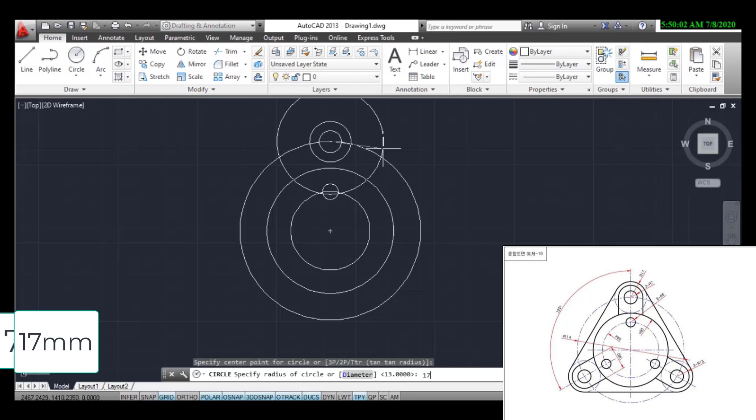Now let us apply the polar array command to all these circles. I'll select the polar array, then select all these circles, press enter. After that, I'll specify this center point here to be the center point of my array. Now let us change the items count from 6 to 3, type in 3, press enter. Then I'll close the array.

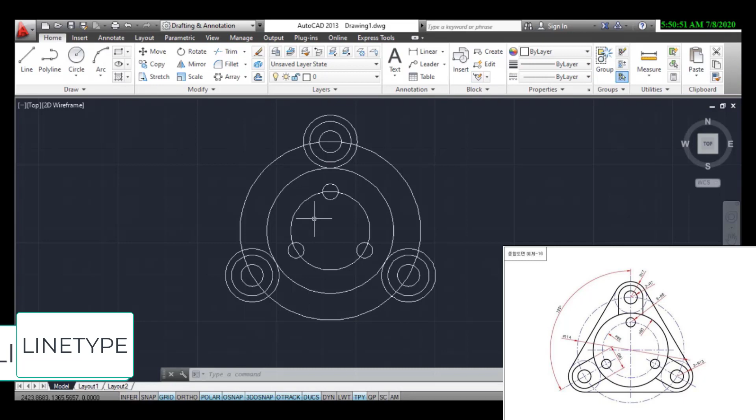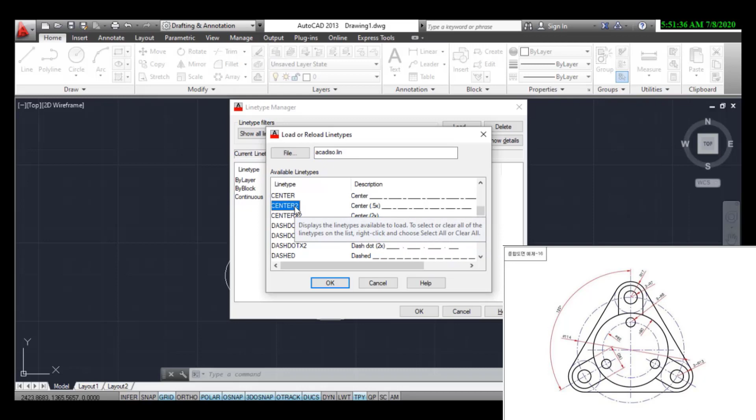Now type in the command window 'linetype' and press enter. A linetype manager dialog box appears. From that, select the load option. Another dialog box appears. From that dialog box, scroll down until you find the linetype written center 2, select it, then click OK. Click OK again.

Now select the innermost and the outermost circles - this one here, and this circle here, and this one here. Now go to the Properties panel and select the by-layer option, then select the center 2 linetype. After that, click on the down pointing arrow of the Properties panel, this one here.

As you can see, we have the transparency option. Let us change the transparency value to 69. Type in 69, press enter, then click on escape. As you can see, we were able to apply the center 2 line option on the outermost and the innermost circles, and then we increased the transparency value to 69 to make these two circles appear faded.

Now I'll draw a line from this point here on the 13mm radius up to this point, from this point here up to this point, then press enter.

Now I'll apply the mirror command. Select the mirror command, then select this line here, press enter. I'll specify the first point of the mirror line from this point to this point. Click enter again.

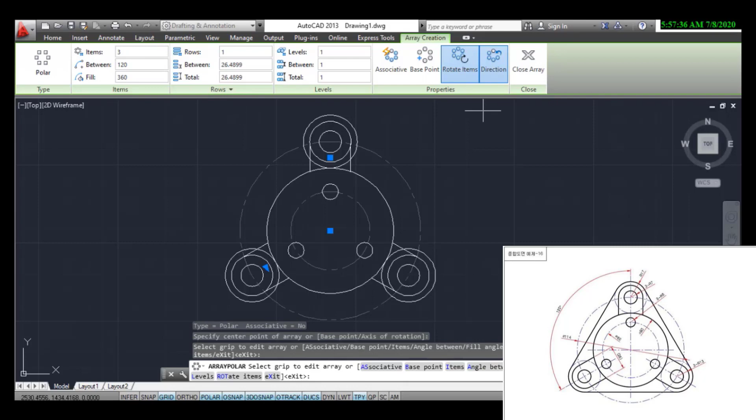Now let us add the outermost lines. Select the line command. As you can see, the center snap option gets in my way, so I'll turn it off.

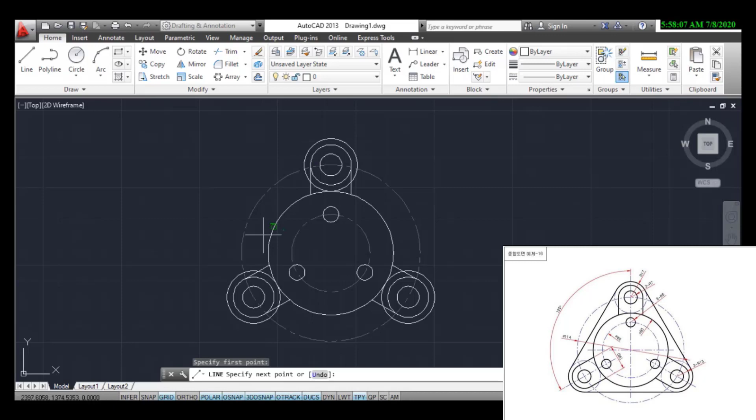Then I'll draw this line from here up to here, press enter. I'll also draw another line from this point to this point, press enter. And I'll draw the last line again from this point to this point, press enter.

Now let us trim all the parts that you don't need. I'll select the trim command and press enter, then start trimming. Also trim this one, and this one too.

Now let us apply the fade and center lines. I'll draw a line. Let us turn on the center snap option. I'll draw a line from this point up to this point, and also draw another line, this one here.

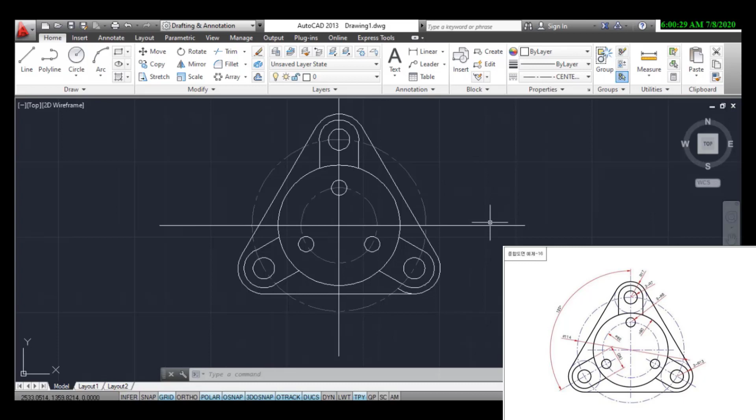Now let us highlight these two lines by selecting them. After that, I go to the properties panel and click on the down pointing arrow on the by-layer option, then select the center 2 option. After that, click on the down pointing arrow again on the properties, then change the transparency option to 69. Type in 69, press enter, then click on escape.

Also apply the faded circles of 17mm radius. Select the center radius option, and from this center point I will draw circles of 17mm radius. Type in 17 and press enter.

After that, I'll apply the polar array command. Select the polar array command and then select this circle here, press enter. Then specify this point here to be your center point. Again, you have to change the items count from 6 to 3, type in 3, press enter, then close the array.

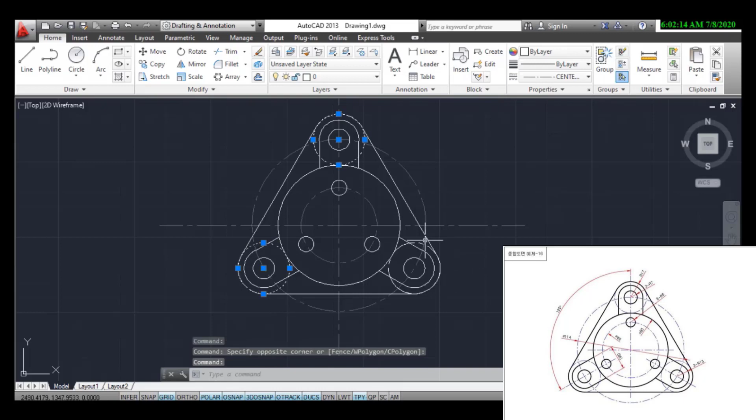Now select these lines here, these circles. Go to the properties panel and click on the down pointing arrow, and then from the transparency option, change the value from 0 to 69. Type in 69 and press enter, then click escape. As you can see, we are done.